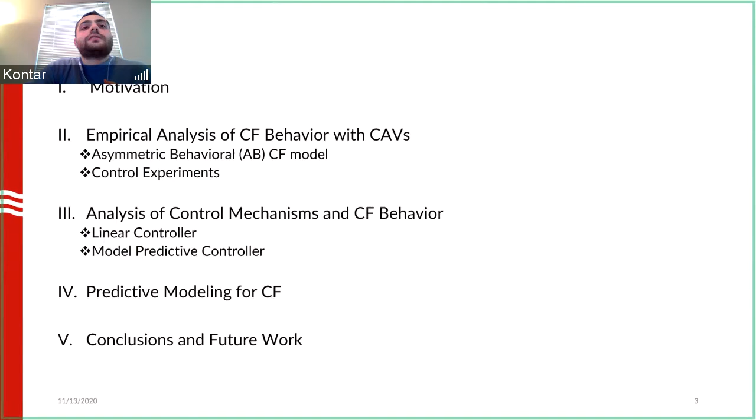A brief outline of what we'll discuss today: motivation for this multi-class automated vehicles problem, some empirical analysis on car following behaviors using real data, and then we'll delve into control mechanisms and discuss the car following behavior of two main controllers, the linear controller and the MPC model predictive controller. Then we'll look at predictive modeling for this car following behavior and finish with conclusions.

When we look at the bigger picture of this new traffic environment, in the previous sense, research in past decades has mainly been influenced by two components: traffic dynamics and intelligent transportation systems. These include sensing capabilities, transportation networks, intelligent signals, various forms of automation, and adaptive control. But now what's coming into play is this new component: automated vehicles.

These vehicles have been described as a disruptive technology that can bring tremendous benefits to our systems in terms of safety, comfort, stability, throughput, and more. But the main thing is there's no free meal, as they say, and this adds major complexity to our system.

This complexity comes from different sources, specifically from how these control algorithms are designed, especially from auto companies that implement various different control algorithms that typically behave differently. We've seen this in empirical analysis, and there have recently been some field data studies on ACC vehicles and other CAV vehicles like Waymo, Nissan, and Ford.

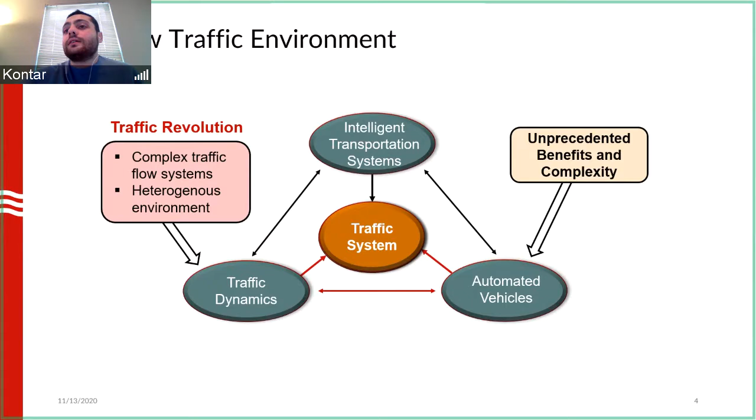Ultimately, we want to provide insight on how these vehicles should be designed so that they are not just beneficial at an individual level, but at a system-wide level—this idea of microscopic to macroscopic design.

This understanding, this connection between traffic dynamics and automated vehicles, has a lot of challenges. Specifically, these challenges are about how to integrate automated vehicles inside the traffic system. The first set of challenges is that traffic systems in itself are a complex dynamic environment, with many influence factors such as varying demand-capacity relationships, road geometry, presence of traffic control, and other complex factors.

What we are adding now is a new level of complexity from AVs, which have different control paradigms and different control logics. The behavior of the AV behaves differently depending on what objective in the control we are prioritizing, and we will see this throughout the talk. This kind of heterogeneity in AVs can impact traffic flow for better or worse, especially under traffic disturbances, which are very common features in our systems and which we expect.

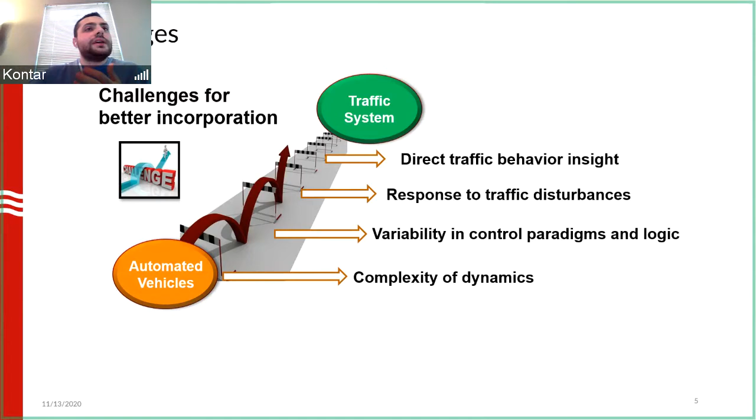Another major challenge is that these control paradigms - linear controller, MPC, or other controllers - originate from control theory or AI-based fields, and naturally they lack direct traffic insight. They can sometimes be a bit of a black box, and we cannot gain direct insight into traffic. They are microscopic in nature, and it's difficult to translate this behavior into traffic-level behavior. So what we're interested in is a systematic analysis of the mechanics of car following behavior under different control paradigms, to better understand how they impact traffic level and how they behave in general. This will give us insights on how to guide the design of AVs with scaled-up traffic level performance in mind.

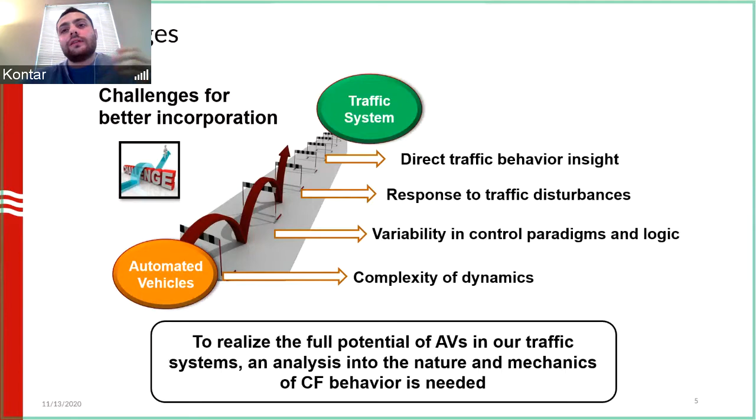So the objectives of this talk are to characterize these car following behaviors under different control paradigms. We want to investigate the similarities and differences in car following behavior between linear controller, predictive controller, and others. Then we want to elucidate how these actually affect traffic dynamics and disturbance evolution.

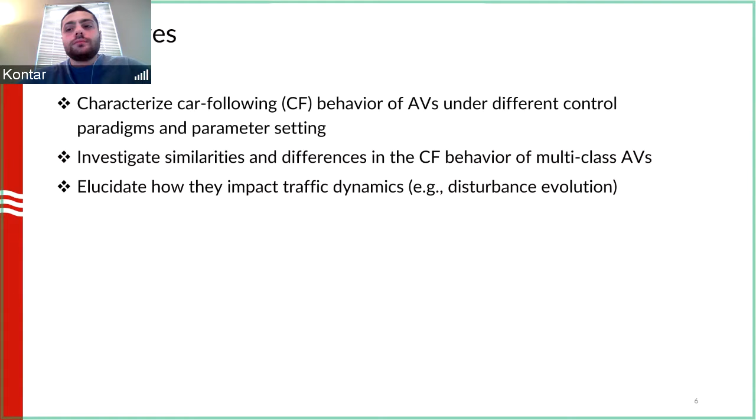The main question becomes: first we will focus on dynamic car following control - what is the control logic, or what is the vehicle designed to do? Once we understand this, we will move into the physical mechanisms of the control. The question here becomes: what drives this physical behavior, or what are the important parameters or behaviors that govern physical car following?

When we capture these two important concepts, we would have some understanding of traffic impacts - what happens at an aggregate level when we have a combination of these vehicles together. This especially applies to loop-type control, where once we know all these behaviors, we can guide the control of the automated vehicle.

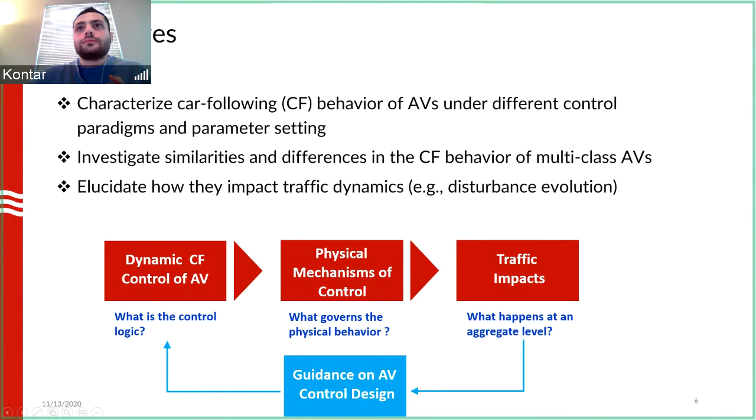A general overview of the scope of this research: we have these different control paradigms - linear controller, MPC, and AI controllers. We're mainly focused in this talk on linear and MPC controllers. AI controllers we are currently studying, but that's a work in progress.

We want to reach an understanding of physical mechanisms, and to do so we analyze the car following behavior. We run different simulations representing various disturbance scenarios and different parameter settings. Then we simulate the trajectories and approximate this dynamic car following behavior using the asymmetric behavioral model, which is a physics-based car following model that extends Newell's simplified car following model. The AB model serves as a unifying framework to analyze the physical mechanisms of the control, particularly those control parameters that affect disturbance evolution and the system state evolution of the vehicle.

When we analyze the car following behavior, we capture key components using the AB model. In this work we also developed a data-driven prediction model to scale up from microscopic to macroscopic behavior. All these components collectively impact the traffic-wide analysis.

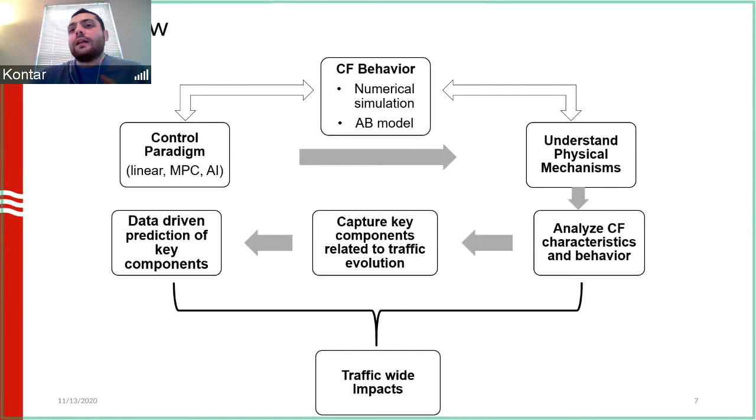Let me move to the first section of our discussion, which covers empirical analysis of car following behavior. The main point we're going to make is that the asymmetric behavioral model is an effective tool to analyze car following behaviors, specifically giving us physical insights into the different behavior of these algorithms and their effect on disturbance evolution.

An overview here: in capturing the physical mechanisms for car following behavior, we use the AB model, which is an extension of Newell's simplified model. The use of the AB model serves three main important features. First, although it might not capture all physical details of vehicle control, it captures key car following characteristics that matter at the traffic dynamics level.

Most importantly, it is flexible enough to serve as a unifying framework to analyze different control algorithms, since here we're looking at MPC, linear controller, and eventually AI controllers. It can also capture dynamics in car following behavior, giving us more direct insight into disturbance evolution.

There have been some empirical studies on the AB model from Chen et al. in 2012 and 2014, but these are mainly on human-driven vehicles. This analysis showed two relevant reaction patterns. The key point is the eta component and its evolution throughout time, which we call a reaction pattern, mainly describing car-following behavior. Two main reaction patterns, or eta evolutions, are of interest.

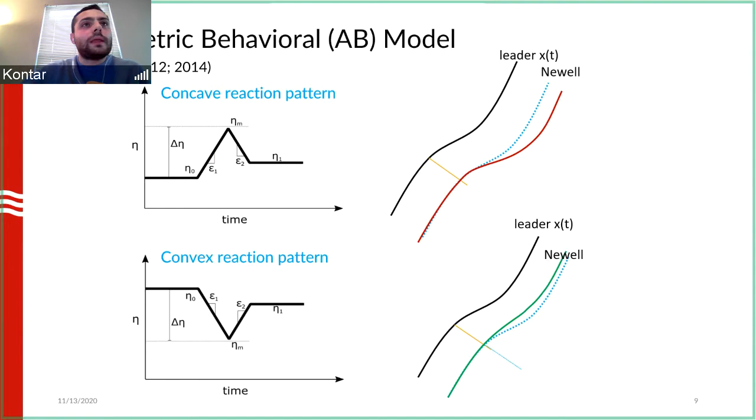But the main question and intuition is that this is not really what we see in autonomous vehicles, and we expect different behavior. To answer these questions, we do some empirical analysis. Mainly, we want to state if it's feasible to use the AB model to analyze car-following behavior of an autonomous vehicle. We want to answer two types of questions: can the AB model approximate key car-following behaviors under different control designs and logics, and can it unveil physical control mechanisms, specifically those related to disturbance growth or decay?

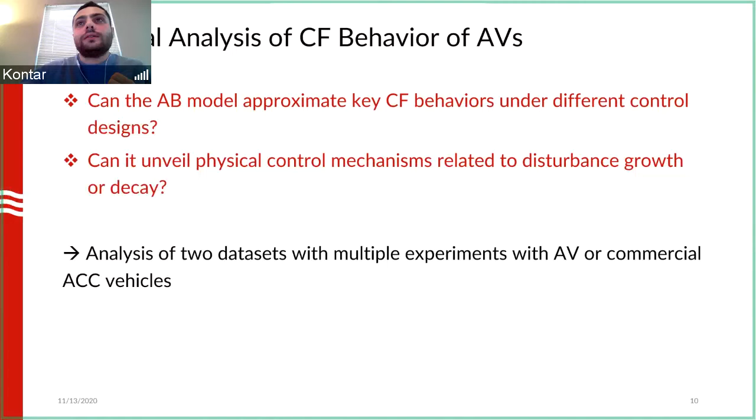The first type of experiment is already available, I believe by Professor Dan Work's group, Stern et al. in 2018, called the Arizona control experiments, available in the literature. The setup involves 21 or 22 vehicles and one CAV vehicle, but the CAV was mainly instructed to behave just as a human-driven vehicle since there's a human inside it. At some point, when there are disturbances, the AV was instructed to maintain some desired speed in an effort to dissolve the stop-and-go disturbance, an interesting controller specifically designed to alleviate stop-and-go cycles.

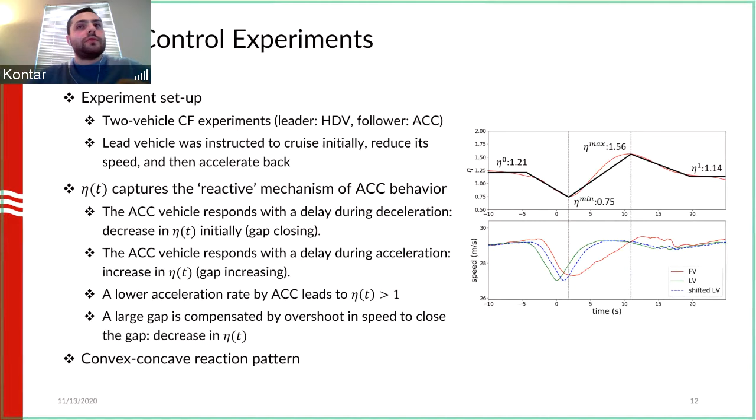So the key insights from our analysis in this case is that the AB model can approximate these key car-following behaviors, specifically that different controllers, as we saw, yield different response behaviors. And this can be effectively captured through the ETA profile. These reaction patterns can help us capture the underlying control mechanisms and the physical control of the vehicle. One also interesting finding is that the AVs differ significantly from the human-driven vehicles. You can see from the AV reaction patterns, they have some sort of compound reactions, which is different from what we expect in a human-driven vehicle.

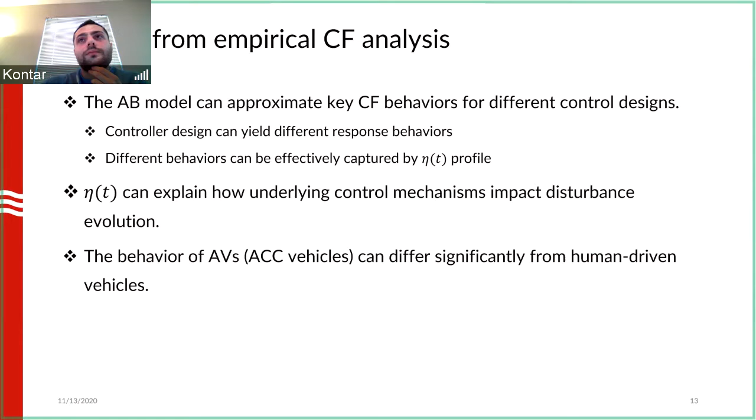So having introduced all this, let's delve more into analyzing these control mechanisms, and we'll focus in this section on the linear controller. Our aim is to really gain some physical insights into how this control mechanism acts and what really governs its behavior. To do this, we first look at a typical linear feedback control structure. There is a lot of literature out there on linear controllers and linear feedback controllers, and they are widely researched and actually used.

In this, we use a typical controller developed in our previous study, Zhou and Ahn, in 2019. The main idea here is that this is a hierarchical type of control. You have an upper level controller, which basically governs this car following behavior, and this is based on the sensor data it's being fed. The sensor data gives you data on relative speed and distance. When this upper level controller has this data at hand, it prescribes a demanded acceleration. But then this controller has a lower level design. The main idea of the lower level design is to capture some uncertainty in the vehicle dynamics, and this is captured through the GLVD, the generalized linear vehicle dynamics equations. After incorporating all this uncertainty, we have our acceleration demanded by the controller.

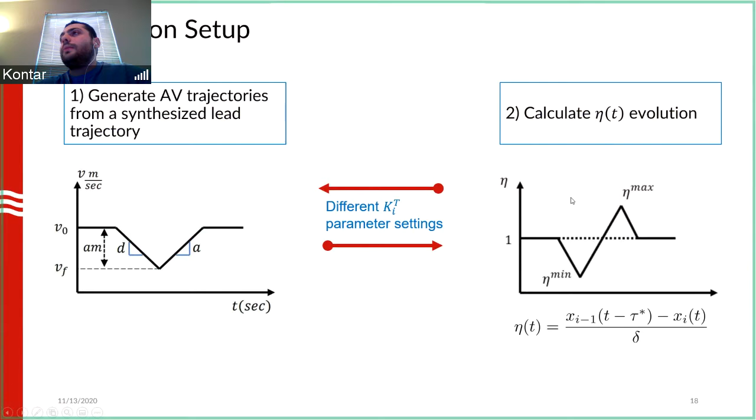So this is what we found is really interesting here. The first part of this analysis is we want to see what is the observed impact of each of these gains alone - Ks, Kv, and Ka.

But then in the second experiment, when I have a Kv dominant, essentially what the controller values a lot here is to match the leader speed. So I want to eliminate this difference between leader and follower speed. And what it does is really interesting.

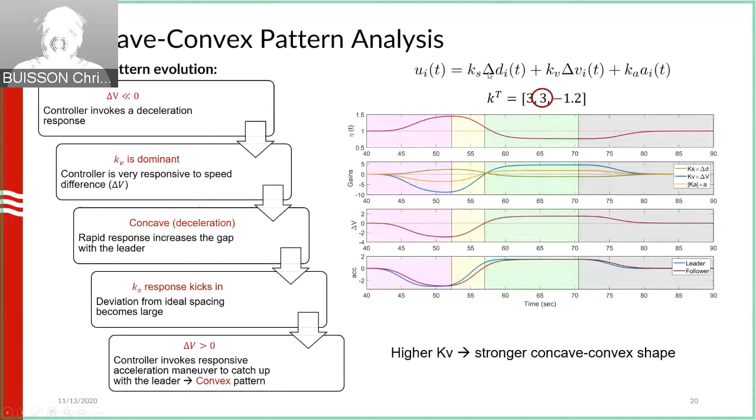But at a certain time, what's happening here is that the gap between the leader is increasing. And at a certain time, now KS, which is regulating the spacing, kicks in and it tells the controller that, okay, I'm too much deviating from my target spacing, I need to go back. And it invokes a response here, and you can see like this KS and a bit of KA start to come in play here.

But then when the leader vehicle starts to accelerate again, so it's the next phase in the oscillation, also what's happening is that the controller invokes a responsive acceleration maneuver to catch up with its leader. And this catching up with the leader yields a convex pattern, because essentially I'm catching up and decreasing my gap with the leader. So in general, what we saw is that a higher KV value yields a stronger concave convex pattern here.

So in a similar fashion, similarly what's happening in a convex concave pattern, we follow the same logic, and logically what's happening is similar. But what we notice here is that this Ka component is what's driving this strong convex concave shape. Because essentially what's happening here is that when the controller invokes a deceleration response, it is not very responsive because Ka is dominating, and it's really resisting this controller to have any change in its speed or acceleration.

So what's happening here is that the follower starts to decrease its gap between its leader, and this yields a convex reaction pattern. But then at a certain time as well, the Ks, which regulates spacing, also comes in play, telling it, okay, now it's dangerous, I need to retain my equilibrium spacing. So what's happening here is that the eta increases, and then we see a concave pattern here, essentially to recover in the recovery phase. And essentially this is also contributed to the fact that the controller is not very much responsive.

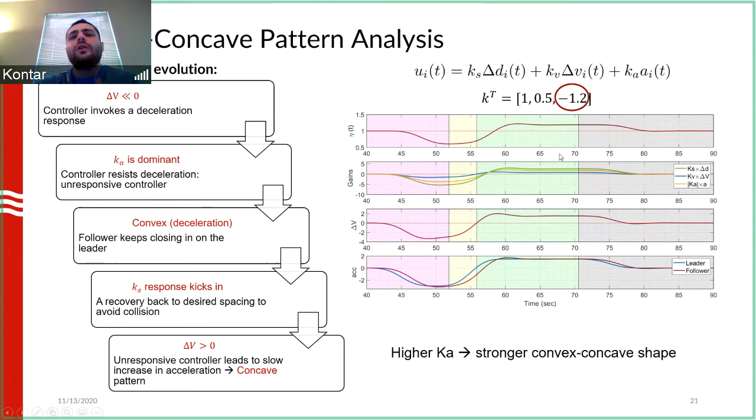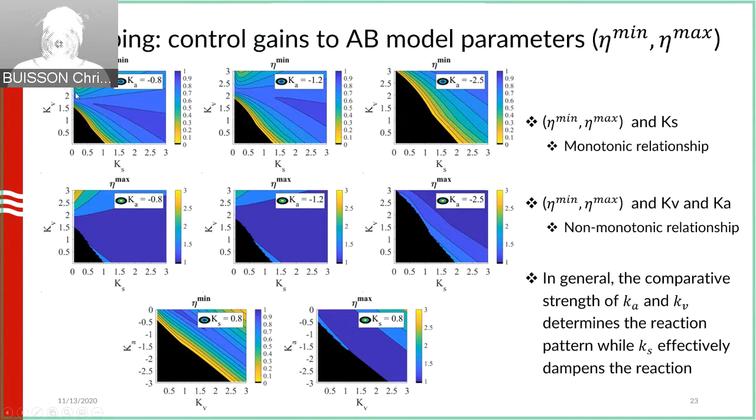But when Kv or Ka increases, there is a non-monotonic relationship. If we look at this graph, when Kv is increasing, we see some sort of a flip in reaction. This is mainly because as Kv increases, I'm going from this reaction pattern to this other reaction pattern, so I'm having a flip in response behavior.

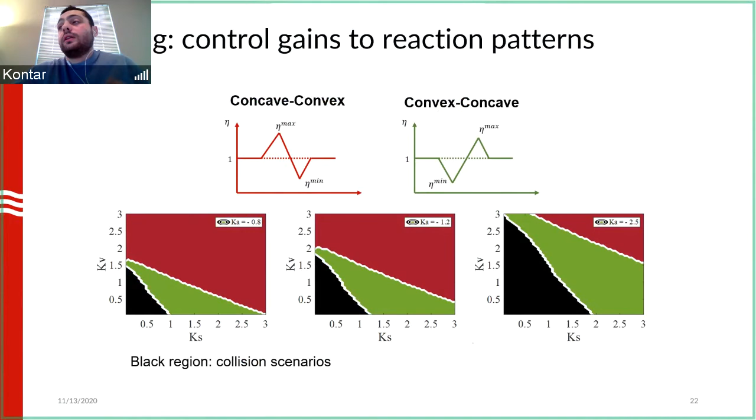So in general, what we saw is that this comparative strength between Ka and Kv determines the reaction pattern, while Ks works more as effectively dampening the reaction or moving it towards a null behavior.

Now we're interested in how these reaction patterns, or how these control gains, actually manifest themselves in traffic level implications. In the first experiment, we looked at whether vehicle ordering within this heterogeneous platoon actually has an impact or not. We have two types of controllers.

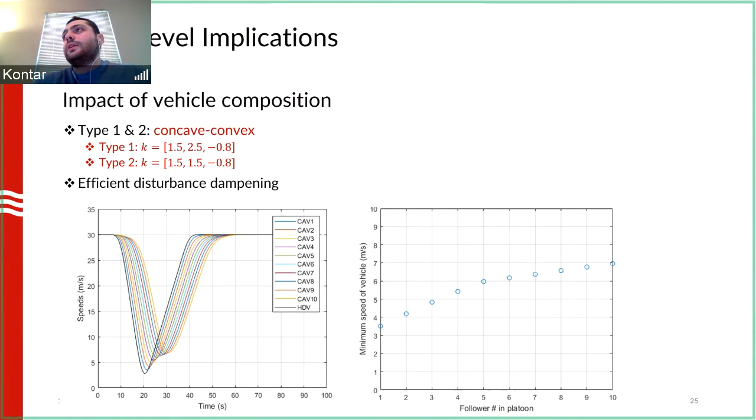But when we flip this scenario, and the average behavior here is dominated by a convex concave pattern, we see there is an overall amplification of disturbance, and the minimum speed starts to decrease along the platoon. This essentially means that our platoon is really working - it's increasing or amplifying this disturbance.

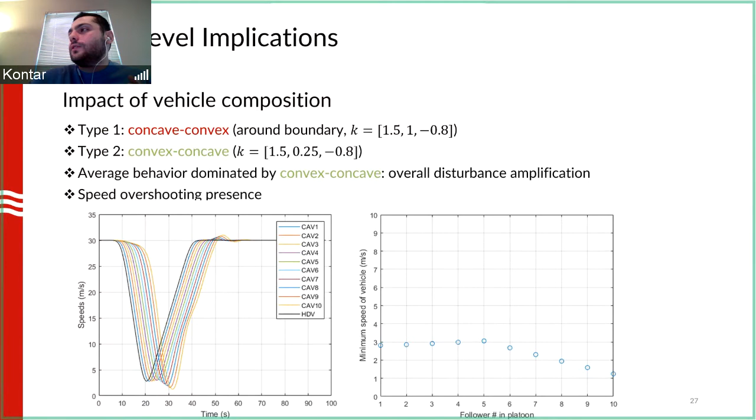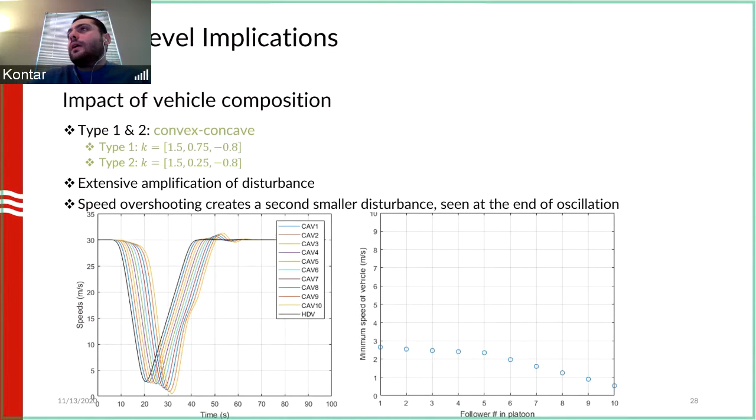And then in this experiment, we really have all vehicles as convex concave, and we can see there is extensive amplification of disturbance. There is even some speed overshooting here, which creates a bit of smaller disturbances, and our platoon is working terribly. So some insights from this analysis is that this car-following behavior during disturbance is captured through

this eta profile, or eta evolution. And we see mainly two prevalent reaction patterns: we have concave convex and convex concave. And there's an intrinsic mapping between these control gain values and these eta parameters from our AB model - so eta min and eta max.

From a traffic level implication, we see that these convex concave patterns lead to disturbance amplification, while the concave convex lead to disturbance dampening. And in a mixed platoon, it's really important to see what is the overall composition of these vehicles, how much each type of reaction pattern is dominating, and this vehicle ordering plays an important role.

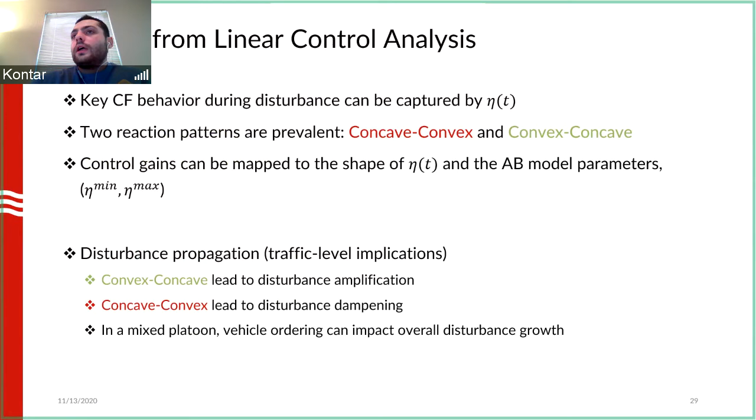So moving into a similar type of analysis, but now we look at the model predictive control. And in the model predictive control, we really have a similar type of formulation, which is a widely known formulation. And the system state is basically the same, because essentially these are the important factors that we want to control and care about.

But here, the MPC develops a running cost function and the prediction horizon. And essentially what's most significant about this MPC is that it allows for constraints to be put in place - so we have constraints on acceleration, minimum and maximum, constraints on deceleration magnitude and acceleration magnitude, and even some safe spacing constraints and deviation from target spacing. These play an important role, which we'll discuss moving forward.

But what's interesting here is that we also have a Qi matrix, which plays a really interesting role. This weight matrix is multiplied by the state vector, which essentially means it's working equivalently to our gains matrix in the linear controller. The first component in Qi works similar to Ks, and it's a coefficient for the deviation from equilibrium spacing. The second component is relative to Kv, a coefficient for the speed difference. And the third component is similar to that of Ka.

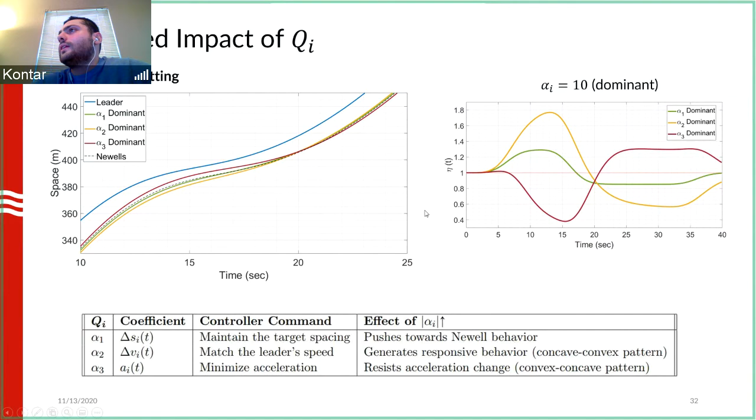And alpha 3 acts also similarly where it wants to minimize the acceleration. It wants to resist any acceleration change, and it yields a convex concave pattern here. And we can see that from the red profile, the vehicle tries to close into its leader more and more.

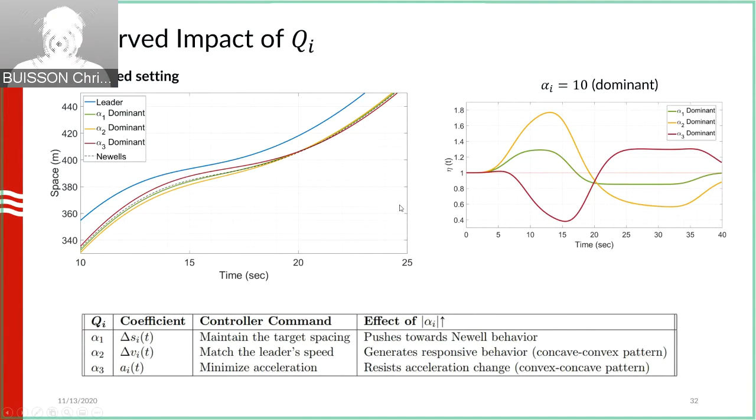So in an unbounded setting, the car following behavior of an MPC controller is consistent with that of the linear controller. But things become more complicated or more interesting when we have a bounded setting. In a bounded setting, the behavior is different for different reaction patterns.

So in this first setting, we focus on this convex concave pattern. And what we do here is we analyze the acceleration bounds.

So in the first set of figures here in the top line, we analyze the bounded acceleration setting. In the first case, the bounded deceleration. In the second case, a bounded acceleration. And in the third case, a compound effect.

So what we do here is we bound the deceleration value of the follower. Essentially, what's happening here is that the leader is decelerating, but the follower decelerates and then has a bound on this deceleration magnitude, and it cannot decelerate beyond that.

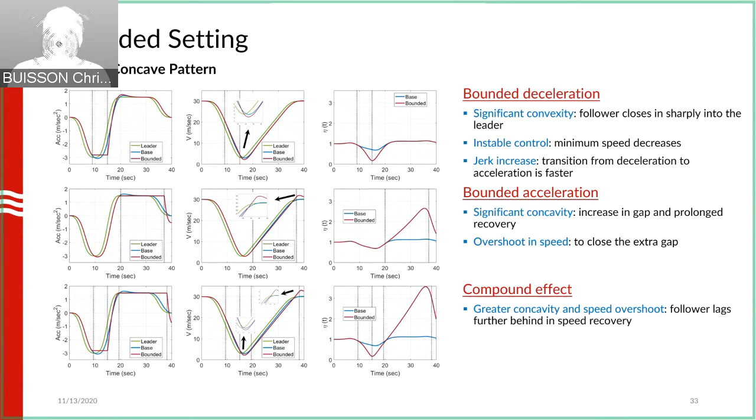So what's happening here is really interesting: when this deceleration is activated, we have significant convexity being developed. And this convexity is intuitive because we want to decrease our speed, but we cannot, so we have this convexity being created.

And this leads to a bit of instability in our control, whereby if we look at the velocity, the minimum speed is decreasing beyond that of the leader. We also notice here that there is a jerk increase, especially when there is a transition between the deceleration phase and the acceleration phase.

So now in the second setting, where we have a bounded acceleration scenario, we bound the acceleration of the following vehicle. And what's happening is that in the acceleration phase here, we see that there is a significant concavity being developed.

And this is really an increase in the gap, and it's prolonging this recovery period. So it's really having this effect on prolonging our recovery phase. And then we do have a bit of an overshoot in speed because the vehicle wants to close in the extra gap being created.

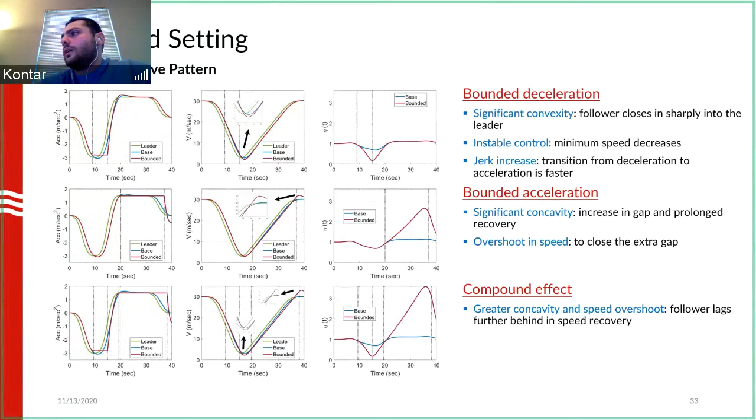And then when we have a compound effect, so when these two bounds are being activated, we have some sort of also a compound effect whereby we have more convexity and much more concavity being developed. So the disturbance duration is increasing and increasing.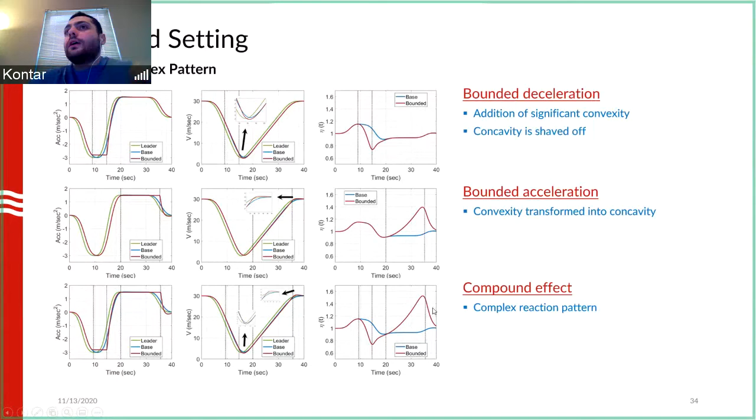So some insights into the MPC analysis we have shown is that in an unconstrained setting, the MPC car following behavior is consistent with that of the linear controller. And we have somehow an analogical mapping between these parameters that we care about in an MPC and parameters that we care about in a linear controller.

And what we notice is that an active deceleration constraint leads to convexity during deceleration, while an active acceleration constraint leads to concavity, a bit of speed overshooting, and a longer recovery period.

So from a traffic level implications standpoint, we ran a bit of experiments, but we're not going to show a lot in here. It's still a study in progress.

What we notice is that when enough vehicles have this deceleration constraint active, this may lead to disturbance amplification, because essentially creating convexity is somehow associated with disturbance amplification. And if enough vehicles have active acceleration constraints, this may lead to an increased duration in disturbance and possibly more smaller disturbances.

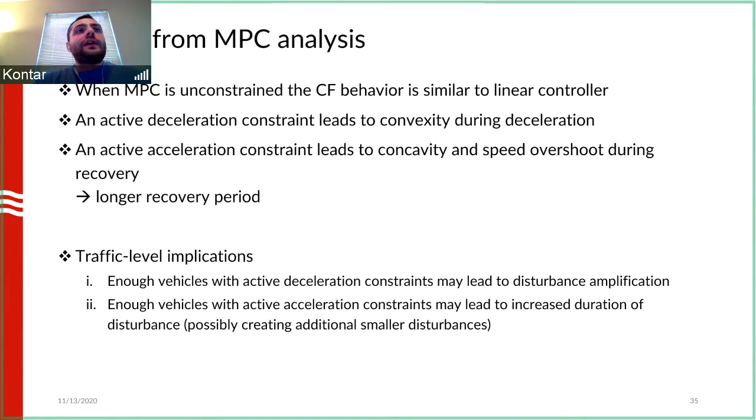So finally, I will go shortly into this section whereby we developed this prediction model for the car following behavior. Essentially, we're using here a convoluted Gaussian process. So the main problem comes here is that if I'm given a control paradigm, a linear or an MPC or any other control paradigm...

...and I'm somehow able to know the physical behavior and the control parameters that govern this behavior, and I can understand the physical mechanisms happening. So given this control paradigm and these control parameters, and for different leader information - meaning different oscillations, for example deceleration, acceleration magnitudes, and drop in speed - the question becomes: can I predict this car following behavior? This is really important in efforts to connect microscopic AV control to macroscopic traffic impacts.

So what this problem boils into is the fact that we want to build this eta profile. Given this information, I want to build an eta profile, meaning I want to predict the eta min and eta max values, and see which reaction pattern I'm dealing with. So I want to predict these two components. We did this in our approach.

Basically, our modeling approach uses a multivariate Gaussian process. The nice use of this model, the main components here, is that this is a dynamic process changing throughout time, and there is some innate correlation in this response. So we want to predict eta min, eta max, while addressing this innate correlation. For this, we use this MGP model, multivariate Gaussian process, because it has a Bayesian interpretation.

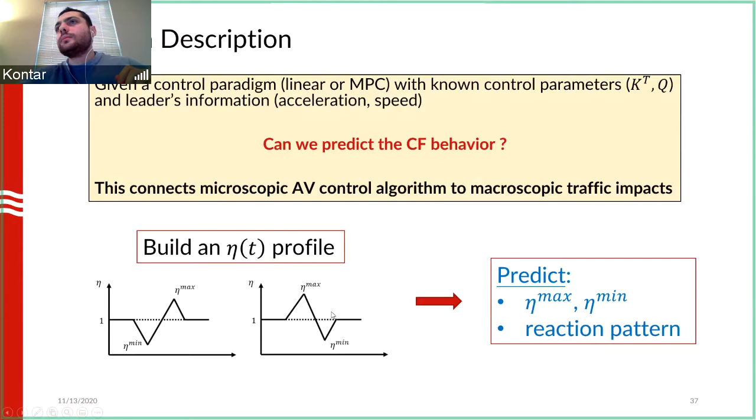So for the sake of time, I will move into concluding here. Some conclusions about our talk: these physical mechanisms of the control are really an important topic to analyze and understand - how these behaviors work, what are the key parameters we want to focus on, and how these translate into traffic level implications. This is captured through the AB car following analysis framework.

When we were discussing the linear controller, we saw that this disturbance evolution is captured by eta of t, specifically by the reaction patterns. We have two dominant reaction patterns: concave-convex and convex-concave. And there's an intrinsic mapping between the control gains and the shape of eta and its parameters.

And when we talk about the MPC controller, we saw that in an unbounded setting, the MPC control mechanisms are consistent with that of a linear controller. What really impacts the behavior here is these constraints - when they are active, they can alter the reaction pattern, increasing our convexity or increasing our concavity.

And then we talk about disturbance propagation, and traffic level implications. We see that generally a convex-concave pattern leads to disturbance amplification, while a concave-convex leads to disturbance decay, which is really useful. And these constraints can lead to either disturbance amplification or a prolonged disturbance, which are of key importance to us when they are triggered.

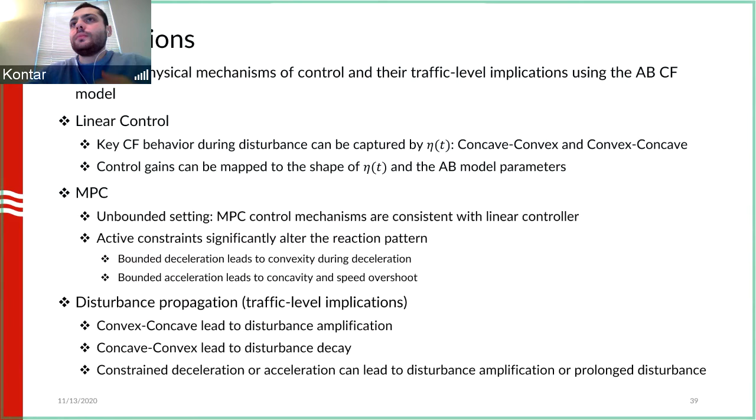So part of our ongoing and future work, this analysis is part of a series of work and part of a multiple ongoing process. Currently we are developing new prediction models, which essentially predict the ETA evolution with its timings as well. So we are interested not only in the ETA min and ETA max values, but when they occur, and after how much time, once a disturbance occurs, can I anticipate a minimum ETA or a maximum ETA. So this prediction of these timings is really key here.

And then we're studying multiple interactive disturbances, and we're analyzing AI-based controllers in a similar, unified framework, to really gain insights on their actual behavior. And we haven't dealt much with connectivity and other types of parameters that can be incorporated in our analysis, which means different control settings, different paradigms, and different platoon compositions and settings.

I will not go through the appendix, but this is for that. So this is the end of my topic. I thank you a lot for your attendance and for listening. Please, if you have any questions, suggestions, and concerns, I'm happy to look at them. I think I'm a bit over time. I apologize for that, but there was a lot of stuff to cover.

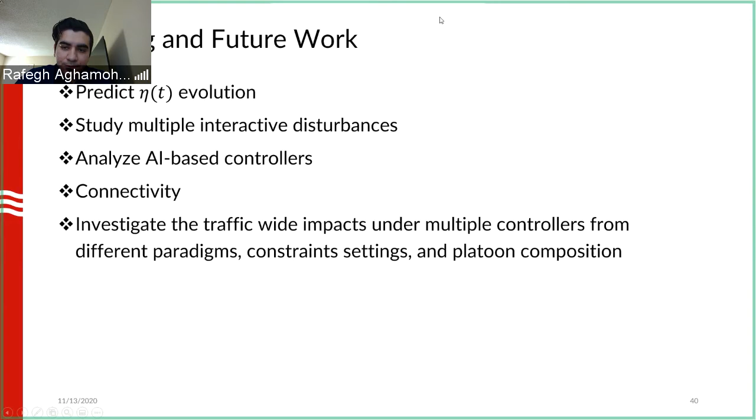Hello, hi, good morning. May I ask a question? Yeah, please go ahead. Hi, good morning. My name is Wenlong Jin from UC. I'm sorry I was late, I thought it was 11 a.m. in our time. Nice to meet you. So I would like to ask one quick question.

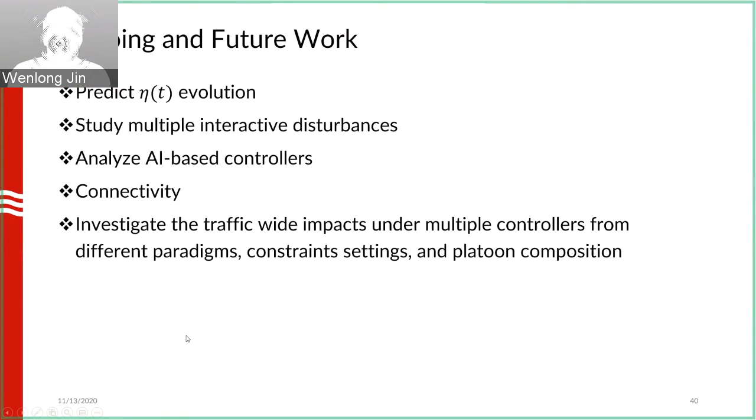I noticed that you examine the model control has a bounded acceleration, bounded deceleration, and I'm wondering if you check if the model is still safe, is collision free.

That's a good question actually. So in our settings, in an MPC formulation, because you have this optimization framework, feasibility is always important, so we want to get a feasible solution. And in this case, when the acceleration and deceleration are triggered, in our setting we make sure that we do have a feasible solution and it's safe, and we still have our safe spacing, and that is actually a feasible solution.

Okay, so maybe as a follow-up, I noticed that you did a simulation. Is it possible to analytically, mathematically prove it? Because if we ever want to implement it, we want to have a very strong, almost mathematical guarantee, that is the best situation. Is it possible to mathematically prove that you really satisfy all these nice properties?

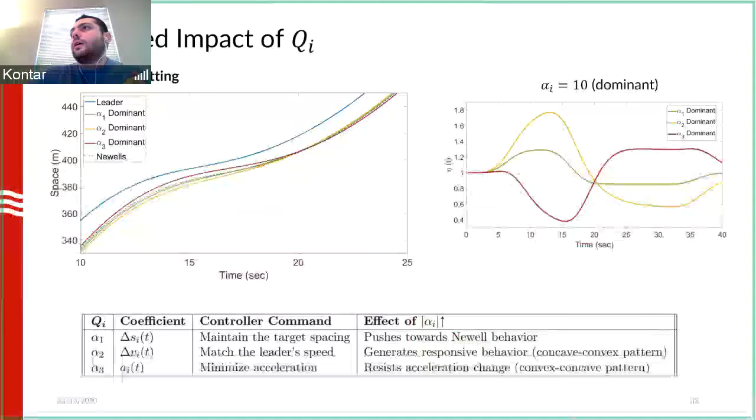Concerning MPC, as you know, proving and guaranteeing stability in a linear controller is actually doable, we can guarantee stability. But when we discuss this MPC formulation, stability guarantees are a bit harder. But from this paper, from Zhou et al. in 2019, developing this MPC controller, they proved some generalized stability solutions, but this is only mathematically derived for certain scenarios and certain applications. So I would refer you to this paper, it has mathematical proofs on these derivations of the stability analysis.

Okay, thank you very much. I've got to run for another meeting. Yeah, thanks a lot for your question.

Hey, hello, this is Shao from University of South Florida. Nice to meet you, thank you for the nice presentation.

You said you have concave and convex, and convex concave patterns. So I just wonder if that is correlated with reaction time. I did not see a reaction time term in your model, but if you allocate different reaction times, you could see different concave and convex patterns, that's what I'm guessing. And also another question is, is the concave convex pattern not just a fixed behavior for each individual? Does it also depend on the preceding vehicle's trajectory? For example, if it's a deceleration, could it be more likely to be concave convex, or is acceleration more likely to be convex or concave, or the other way around? I'm not certain, I have these two questions.

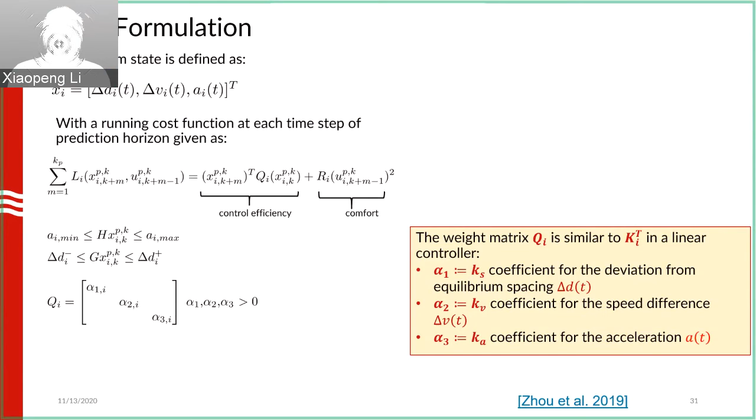Thank you. So concerning the time varying response, definitely these reaction patterns are dependent on these different time gaps.

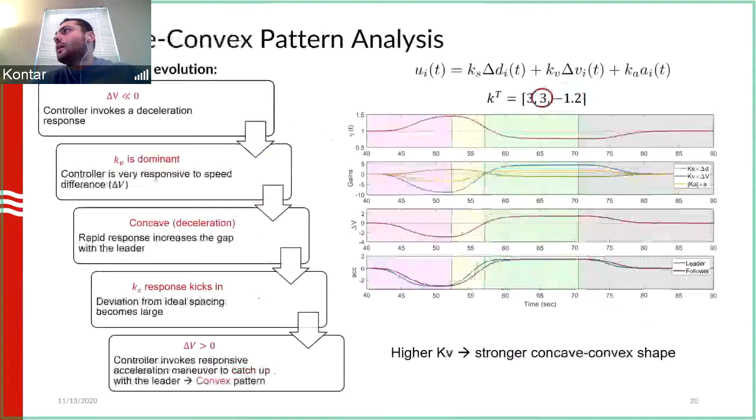Specifically, we're looking at this time gap pattern here. This time gap parameter has a really big impact. It can change our response variable, concave, convex, and essentially changes the magnitude of these two different shapes, but the shape is still preserved, and we see those reaction patterns. Somehow the magnitude is definitely dependent on the reaction response time here.

And I would also like to add that in the lower level design, when we're controlling for uncertainty, we have this really important parameter called actuation lag. We delved a bit into it, but we didn't give a full analysis on it. This actuation lag is a lag in response relative to uncertainty. It is a key component, because if the actuation lag is large enough, there's an oscillation happening, and the vehicle cannot respond in time because it's delaying its response. Somehow it's not responding well because there's some uncertainty.

And what's happening is that this oscillation gets compounded and compounding, and we have a much worse performance. In this case, we expect the convexity to increase a lot, and maybe the shape might differ, but we have a really bad situation where there is no stability at hand.

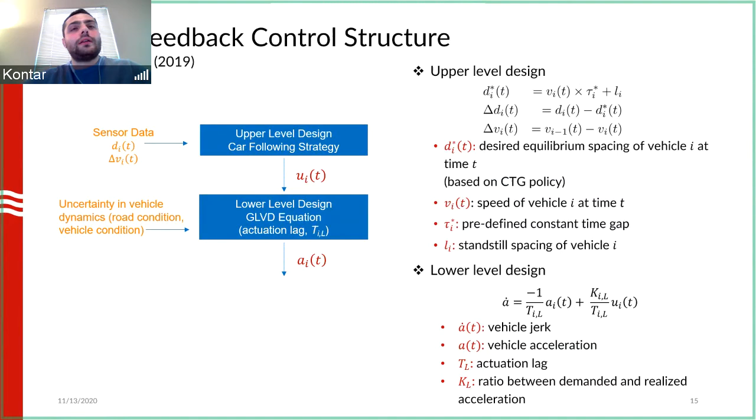Yeah, thanks. I mean, whether the concavity depends on the vehicle's trajectory. Yeah, so these concave and convex patterns are mainly relative to what the leader is doing. They change with the leader trajectory, they change with the control settings, but they are not really a function of what the second vehicle is doing. They are basically a one-to-one relationship between the leader and the follower itself.

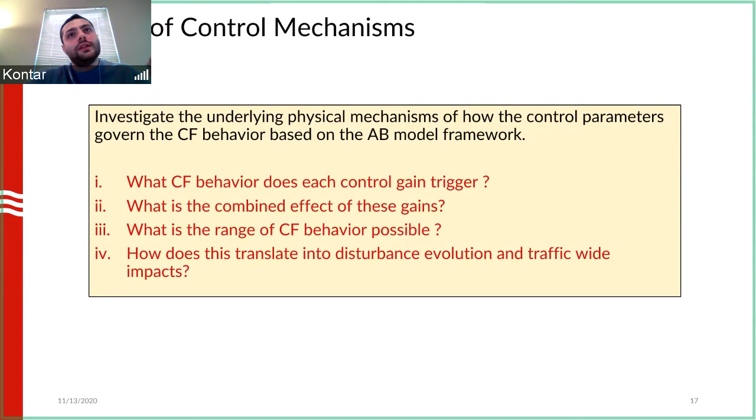And to expand on this, what we are looking into more is this concept of connectivity, because from a linear controller, you can also have feed-forward gains. Essentially, you're feed-forwarding your acceleration values, or what's happening with this following vehicle, across the platoon. And this has a major impact, because now this reaction pattern is not just dependent on what's happening with the leader and the follower, this coupled relationship, but also on information coming from across the platoon.

All right. Thank you. Yeah, thank you, Wissam. That's great. Thanks a lot, Professor. Thank you.

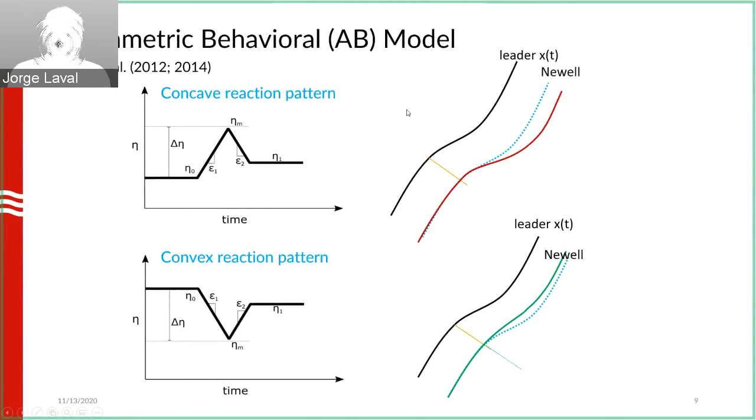So I have a couple of questions. Why do you think these concave convex patterns arise? Is there a physical explanation? It's related to the controller, right? The fact that it's linear, maybe. I'm trying to guess, but maybe you said it.

Yes, so these definitely arise from the system state. They arise from how we are responding to these disturbances coming from the leader. A leader undergoes a certain disturbance, deceleration, then acceleration, and we are responding to this deviation from target spacing and to these oscillations with a certain magnitude. This response to the deviation is captured through a deviation from the Newell spacing or Newell trajectory, which is captured from the eta profile. Essentially, when the gap increases, I have more concavity, and when the gap between me and my leader decreases, I have more convexity. So this is how the system state evolves throughout time. It's similar to how this eta t parameter is evolving throughout time.

But for a physical explanation, I think it's just like an error. Before it overshoots and then it undershoots, it's like converging in a sine wave pattern, maybe, to the Newell trajectory. Just kind of going up and down. I don't know if you've seen more than one cycle. Here you showed one, but maybe you have a sine wave that keeps getting smaller. In these simulations, we have only one cycle, but in the empirical analysis, we have multiple cycles, and we see this eta increasing, decreasing, increasing, and decreasing, and specifically, it's some sort of disturbance.

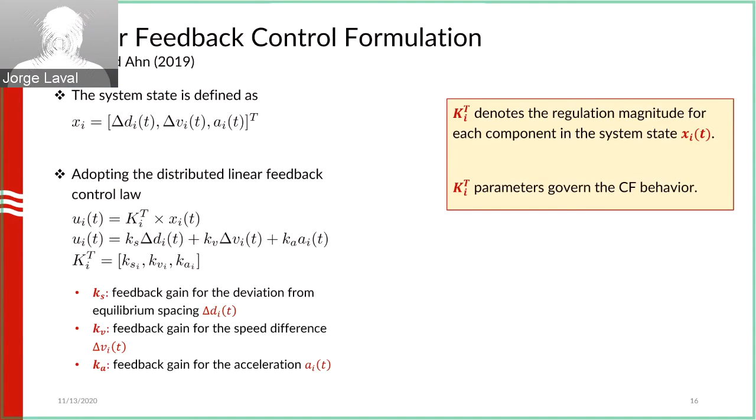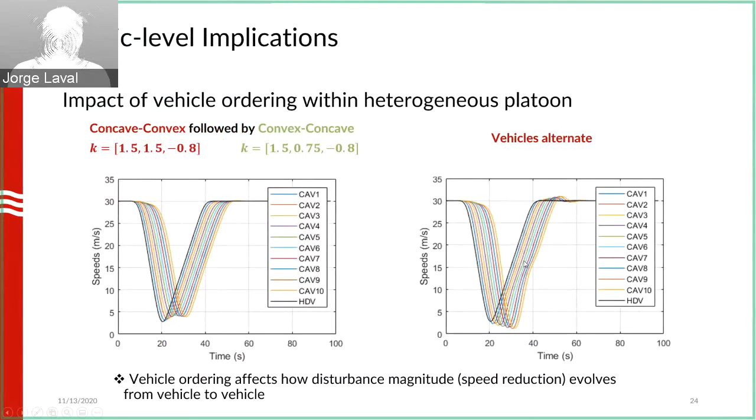So to me, the explanation is that the linear controller is not perfect. It's kind of an error that it's trying to converge. Yes, definitely, the linear controller is very much prone to error, and we can see that in these settings. An error these linear controllers can have, if you see the velocity profile here, it can actually amplify this disturbance when it tries to copy it from vehicle to vehicle. We can see that this speed profile has an overshoot at the end. So this linear controller, when it's trying to converge, can actually create disturbances along the way.

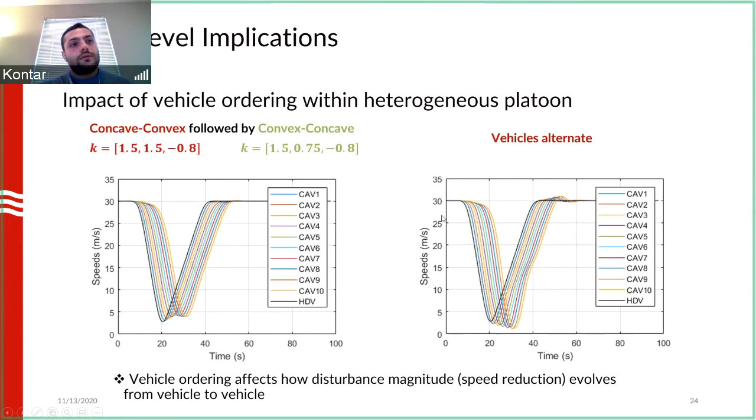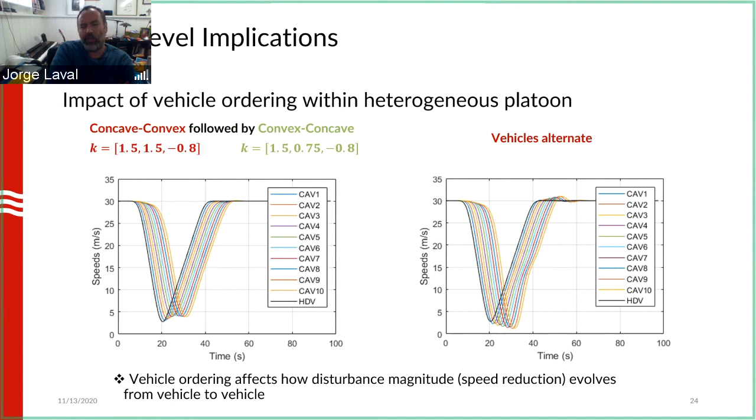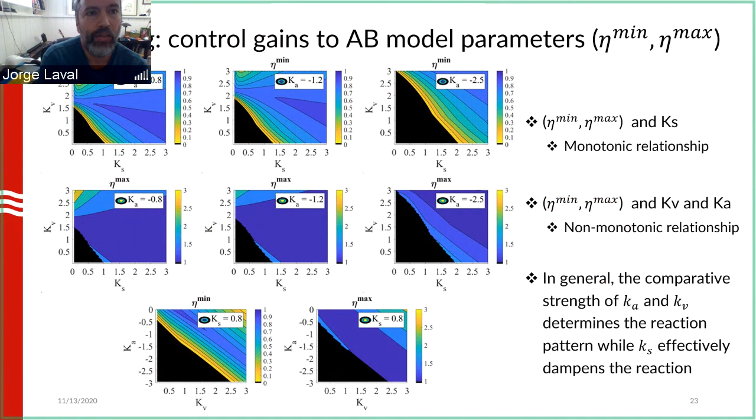And also you showed a figure where you stopped, where one parameter is dominant and you showed that it converges to the Newell trajectory? Let me... this one here?

So wouldn't that be a solution to all our problems? And by problem, I mean diminishing the string instability of these ACCs. Yeah, that's a very interesting question.

But essentially, in some sense you actually want your controller to behave in a concave-convex pattern, because you want to make sure that you're effectively dampening disturbances and not just reacting similar to logistic behavior. We want effective dampening, and if we want to achieve this, this is one type of achievement for autonomous vehicles - they are effectively able to dampen disturbances, and this effectiveness in dampening disturbance is related. So you're saying that with the convex-concave pattern, you can dampen in any concave situation? Convex - yeah, in a concave-convex pattern, this pattern here, you can achieve an effective dampening of disturbances, even for really pronounced disturbances.

Right, but you overdamp, right? But yeah, I think this is a great direction, an indication of how to set these parameters if you want to limit string instability, right?

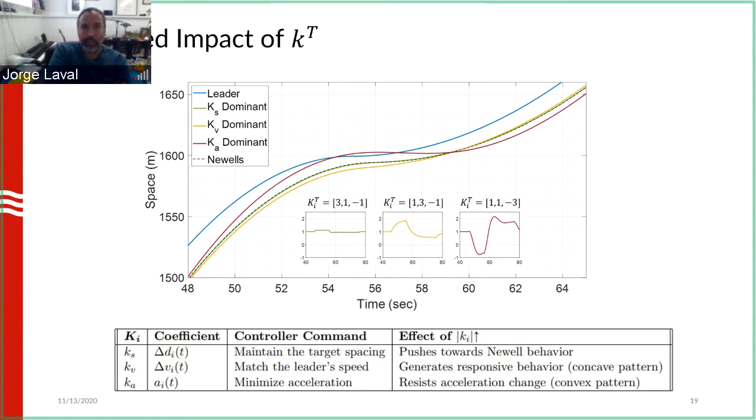Exactly, so this raises a very interesting question, the problem of what is the sweet spot here - the sweet spot between achieving good throughput, achieving good stability, and achieving this sort of balance. This is something we're trying to achieve by analyzing these control parameters. Essentially, I don't just want to put these parameters arbitrarily to have string stability, I want to put them in a way that I'm effectively dampening disturbances, achieving traffic-level advantages from throughput, stability, and all this. So there's this sweet spot of parameters whereby I need to really pick them the right way.

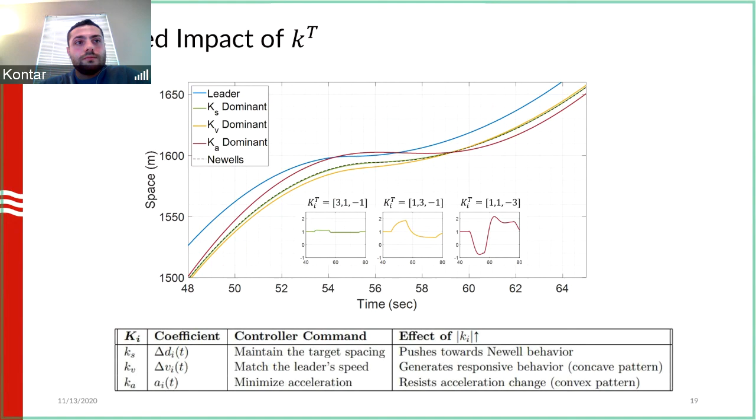Really interesting. Do you know if the original work of Stern et al. found something similar or related? So in this work, you mean from the reaction pattern shape?

In this work, what we mainly use is their field type analysis. But the main interesting point is that in their experiments, they have a specific control logic - their control logic is just to dampen this stop-and-go disturbance by putting this average speed. But if you look at this case, you could say that control logic might not be very effective, because if I put my speed as the average speed, I can create a lot of gap between the leader - I can really increase the gap between the leader, and this might not be an optimal controller to design. Yeah, that's like over damping, right? Exactly, so you're creating this really large gap.

All right, that was awesome. Thank you very much. Do we have any more questions? I guess we went really overboard, but sorry for that. I guess not.

Yeah, go ahead. I'm just saying there's a series of other works here, and we're expanding more on this analysis, and hopefully we can share with you sometime soon.

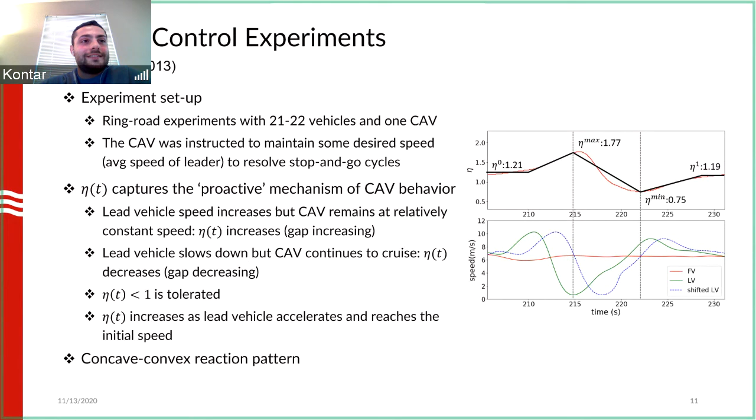Yeah, excellent, good to see your co-author Swan there. Oh, really nice work, congratulations. Good to see you, Jorge. Yeah, great job, Wissam - he's the one who did all the heavy lifting.